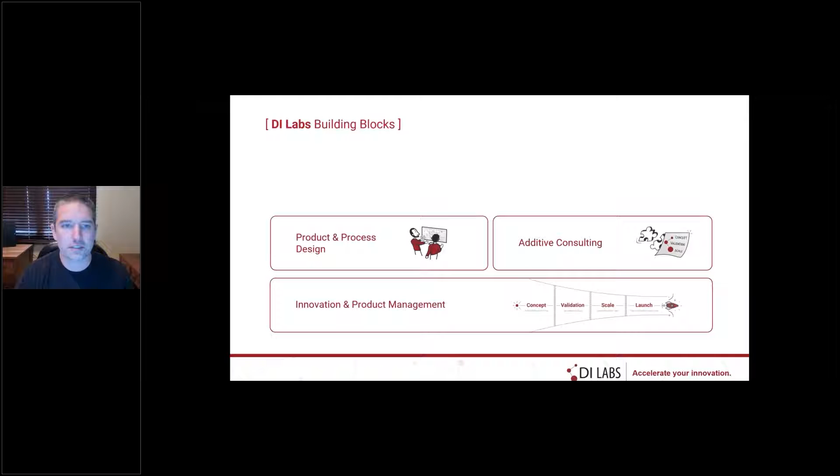So we use those capabilities to produce functional prototypes. These are things like 1Z, 2Z type parts, maybe up to 10 prototypes, generally used for look, feel, or function to validate a design before going into production. In addition to that, we've got what we call complex prototypes. We've got one in the presentation today—it's something that can't be produced as a single part, or it's extremely complicated. And we've got something neat to share today.

Then finally, we use those capabilities to run full production. We've got a couple of examples we'll share today where we'll produce parts in the tens of thousands on our additive equipment, using our equipment in place of traditional manufacturing like injection molding, for example. So those are the building blocks for our business.

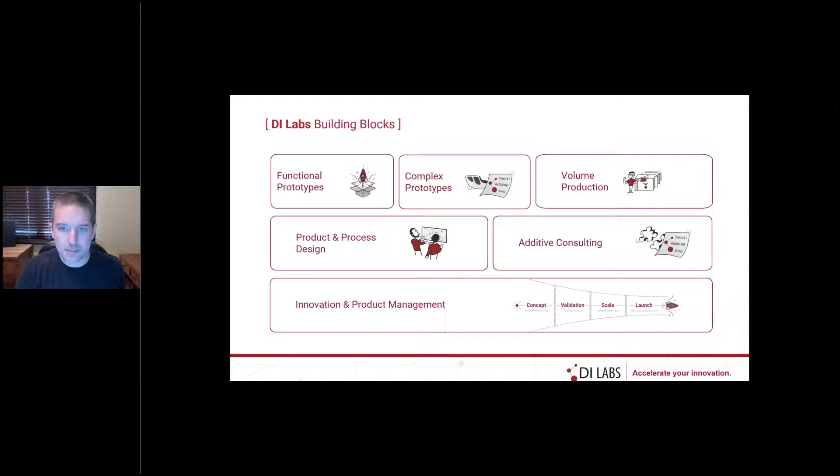I'll share a little bit about our history. Brian and I founded our company in 2013. We're geeks, we're gearheads, so we founded our company as a product development firm. The very first thing we tackled was the redesign of print heads for fused filament fabrication machines. One of the challenges we faced was we needed to be able to do prototyping to serve our customers' needs, but we needed to do it significantly faster than the technology on the marketplace would allow. So we developed a printhead system that was 2 to 4 times faster than anything else on the market.

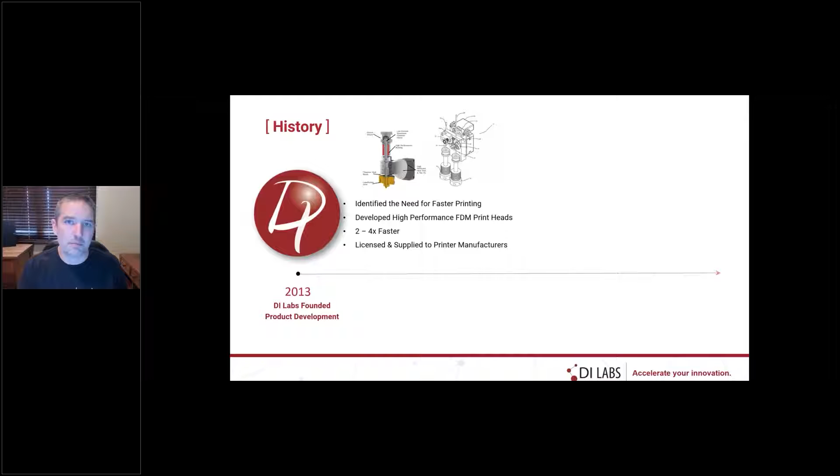And we did that for ourselves, for our in-house needs, and we found that the market also needed that technology, so we ultimately licensed and supplied that hardware technology to printer manufacturers. I think that's important for us to share, simply because we've been deep into the thick of it, and we recognize the need for speed—the need to get to market faster and capture the opportunities before your competitors do. Along with the development of that technology, we've also been developing products over the last several years.

Up until 2017, we were using the FDM technology that we had developed, along with SLA, to provide prototypes to our customers. We also did some outsourcing to other service bureaus, but what we realized was that either the quality wasn't there or the speed for us wasn't there.

So in 2017, we made our first major expansion with additive manufacturing, and we purchased an HP Multi Jet Fusion machine. We're proud to say we were the first in the state of Minnesota to have this machine, and it was necessary for us to provide quicker response time to our customers, as well as greater volume capacity. We purchased that at the end of 2017.

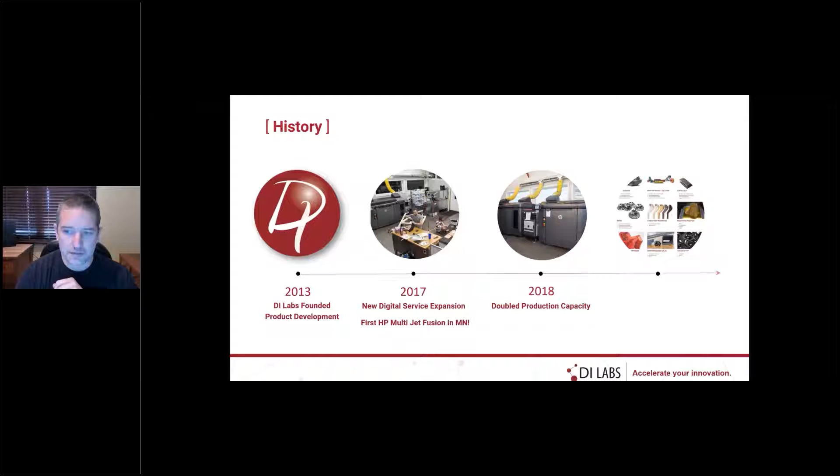About a year later, we doubled our capacity and brought on another 4200. Since then, we've continued to expand our technologies and technology portfolio to serve our customers' needs. Essentially, the way it works is our customers will bring us a project, and if we don't have the capabilities to serve the need for that project, then we'll make the investment in the technology to be able to do that.

We love to solve problems.

So looking at our technologies from a portfolio standpoint, we offer several different technologies. We operate the Multi Jet Fusion machines, both in grayscale as well as full color. We've brought on the Carbon DLS technology, which was a recent move. And we've got the Markforged machines as well, so we're able to print metal on the Markforged Metal X, and composite materials on the Markforged composite machines. In addition, we've got the standard FDM type technology for ABS and PLA, and a special machine that we run PEEK and Ultem and engineered materials on. And finally, we operate SLA.

And then we get ourselves into some pretty advanced finishing technologies, things like nickel plating, auto body level painting, or chemical processing of parts to provide smooth, sealed surfaces. So those are all things that we bring online to solve needs that our customers have for the finished products that we produce.

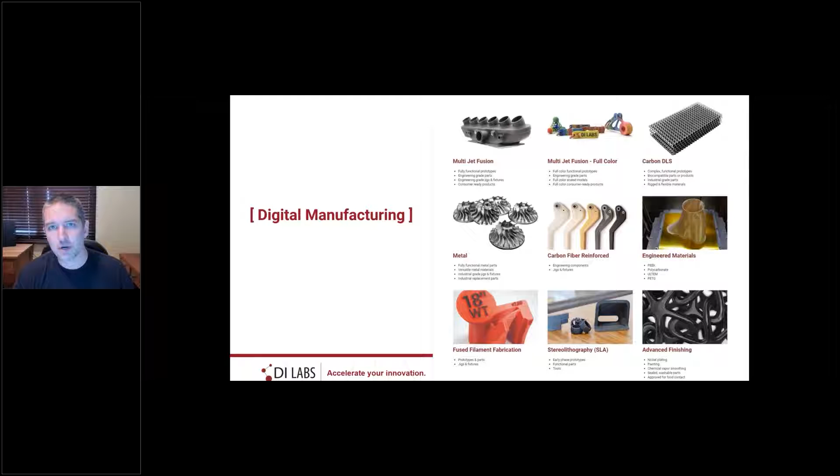So what does that mean, competitive advantage, and how do we use additive to provide that? The way that we think about it is in terms of the product lifecycle. I know that most of the folks on the webinar have been familiar with this type of graph. We added the development stage to this lifecycle chart.

Essentially, we've got the development stage, introduction, where the product gets introduced to the market and you start to build sales growth. Then you've got sales growth ramp up, which leads into a mature product line. And ultimately, at some point, that product line will mature and end up declining in terms of demand from the marketplace. We use additive manufacturing in each of these stages today.

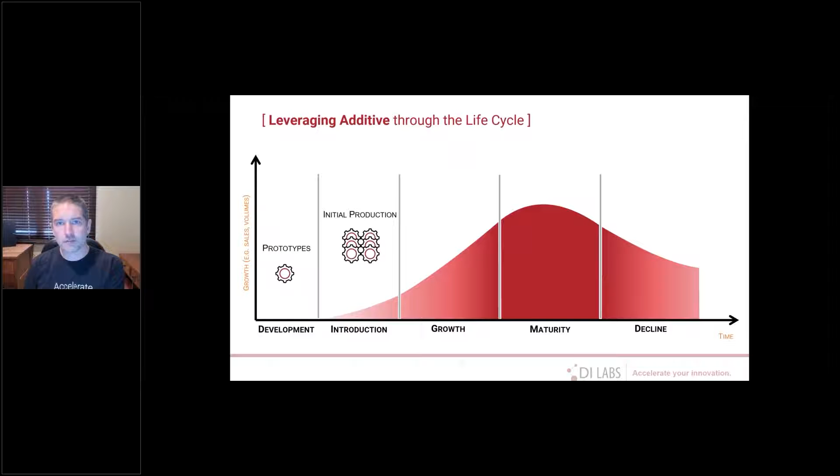In terms of development, I think we're all familiar with using prototypes for development activities—it's been common for decades. We're also using additive manufacturing for the initial production, thinking in terms of offsetting risk and getting to market sooner. We'll share some examples where we use our additive manufacturing equipment to bring products to market, get customer insights earlier and more often, so we can sense what failures may exist before we go all in.

Going through the growth phase, we'll use additive manufacturing in terms of a bridge solution. Where we start to get to that volume demand where additive manufacturing may not have the capacity, we'll use additive to get us to the place where we can use injection molding. So we'll consider that a bridge production tool.

And then in the mature stages, we'll use additive in terms of jigs and fixtures—really to help aid in the production of products using traditional technologies like injection molding or subtractive manufacturing.

And finally, in the decline stage, we're using additive for on-demand repair supply. Rather than having extensive inventories of parts for products that are obsolete or out of date, we're using additive to basically serve as an on-demand supply chain. As parts break, we're able to respond quickly with production, which saves extensively in terms of cost of inventory.

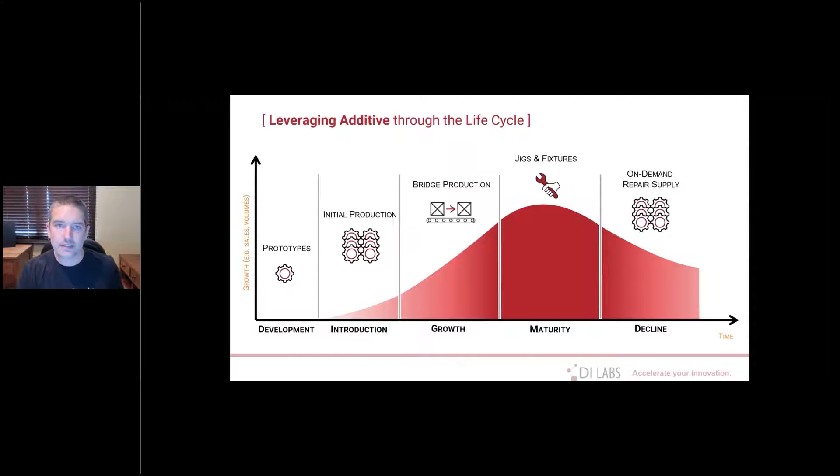For the talk today, I'm really focused on these four segments.

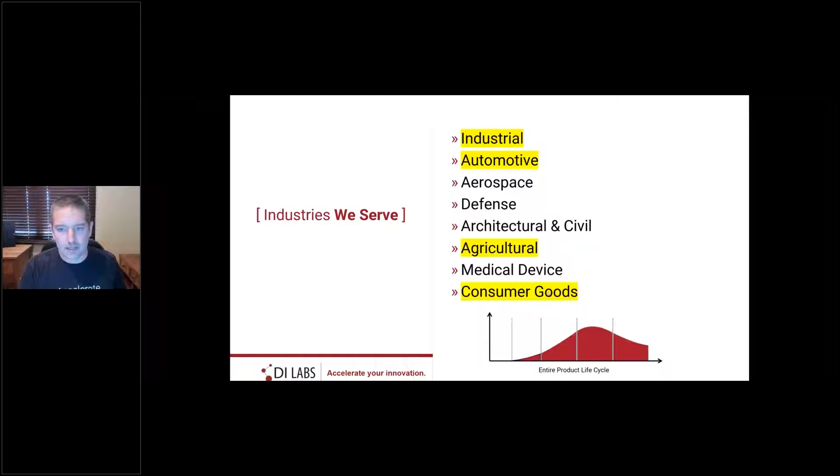Each of the examples we have today can be applied to all the segments shown on the screen, but primarily focused on these highlighted segments. And then finally, all of the examples we have will at one point or another encompass the entire product lifecycle from cradle to grave, and as we go through each product example, we'll highlight where they serve the life cycle.

So, case studies. We're sharing case studies in a two-step approach. First, I'll share with you the case study itself, how we applied additive manufacturing to solve a problem, what the results were, and where in the life cycle that solution took place. Then we'll go behind the scenes and share how the product or solution was made, basically how we did what we did. We'll share some tricks, secrets, packing configurations, and special considerations we had to take to solve the problem.

As we go through this, I've got 5 or 6 different examples. What I'd encourage everybody to do is, as you've got questions, raise your hand digitally or ask the question, and we'll do our best to answer those questions as we're going through the presentation. But please ask them as you have them.

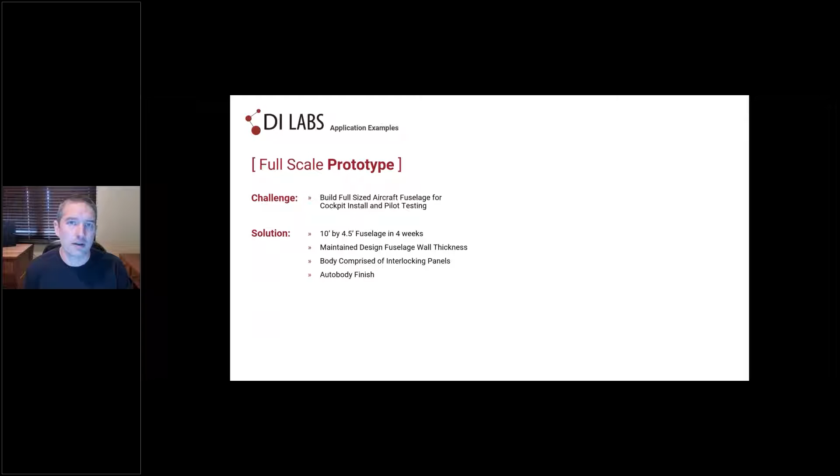This is an example of what that vehicle looked like. This isn't the exact product we produced for them, but one we've done for ourselves to demonstrate the capabilities. Now this fuselage looks seamless on screen, but it was produced with about 130 panels, and there are two halves. We're showing the autobody-finished half on this side, and the other half is unfinished. This particular model was about 8 feet long.

The stage of the life cycle we supported with this project was the tail end of the development stage, to validate the design. It's also been used to ramp up sales and provide visuals for potential customers, allowing them to see the aircraft before the mold and finished product was on the showroom floor. So this is a great example of using a full-size prototype to basically develop pre-sales with customers.

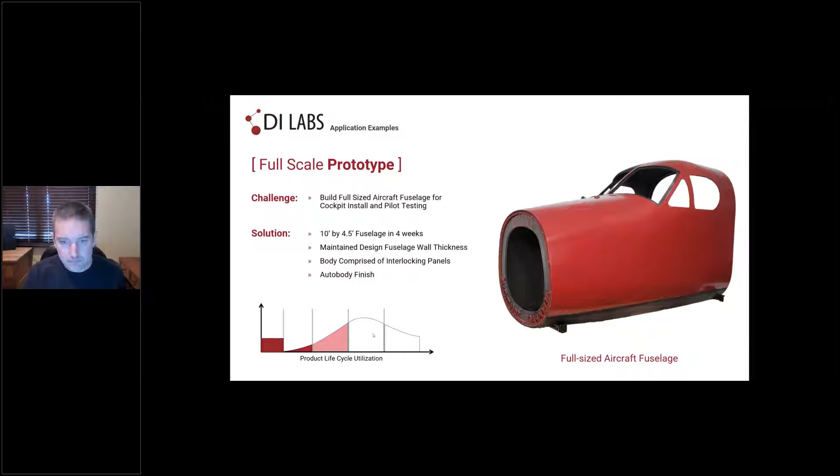So then the question is, how did we do it? That particular model was comprised of over 130 panels. That's pretty tricky because the panels are thin, and they all have to lock together - you can imagine it's like a three-dimensional jigsaw puzzle. So we had to design the panels to minimize or eliminate warping and dimensional change.

We designed the pack to optimize the thermal management so that we could produce the body panels fast and in volume without having distortion, and finally, to be able to maintain the outer surface of the skin.

This floating image on the screen shows one of the packs we had for the panels. As you can see, there's maybe 10 or so panels in this pack. There's also some other parts in this file that we ran along with this particular project. The entire fuselage was produced with nylon PA12. So this virtual pack shows what would come out of the HP multi-jet fusion, in nylon 12.

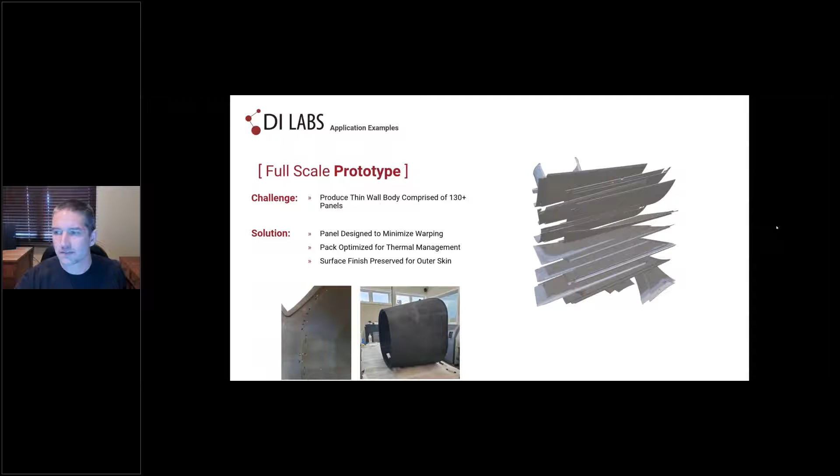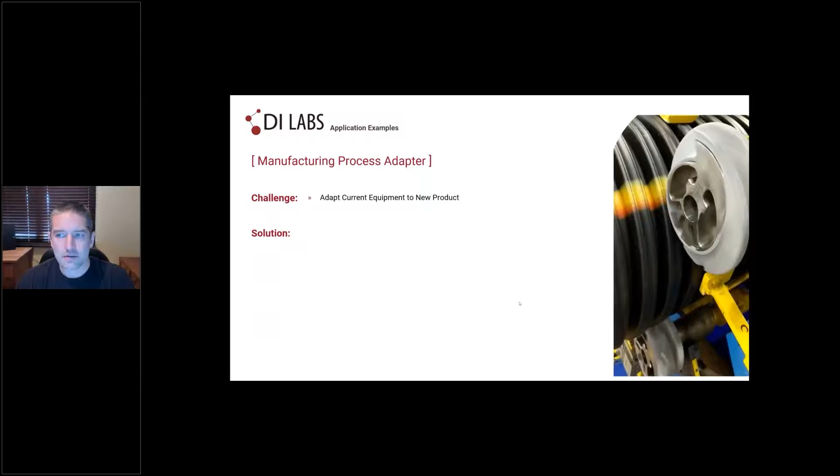Alright, we'll move on to the next case study, and change gears here quite literally. This was a manufacturing process adapter used for a customer that had developed a new product. It was a plastic tubing product, and they were challenged because the new product was different enough from their current tubing that the downstream processing equipment they had wasn't compatible with it. So they brought us the challenge of adapting the existing equipment to the new product, and doing so in a very short period of time.

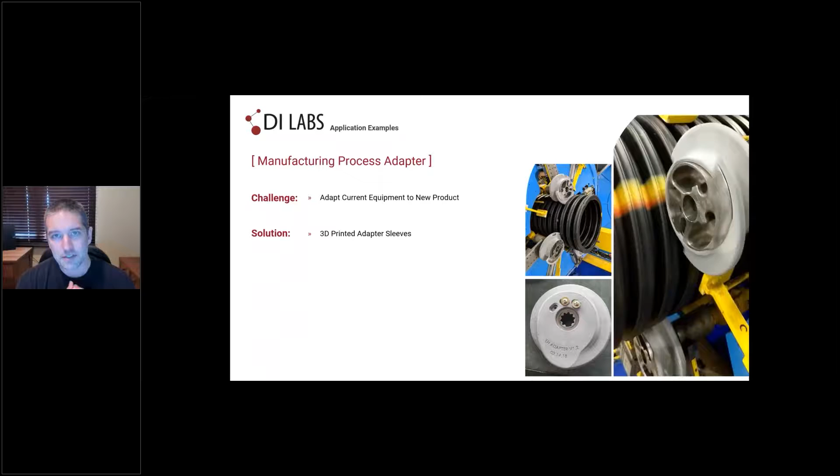As you can imagine, the product was being produced, and they had this secondary process where they needed to modify that product and get it out to customers, so time was of the essence. They brought us this challenge, and what we did was essentially 3D print adapter sleeves out of nylon PA12 and have them fit over an existing aluminum machined hub. So we adapted the existing technology for the new product.

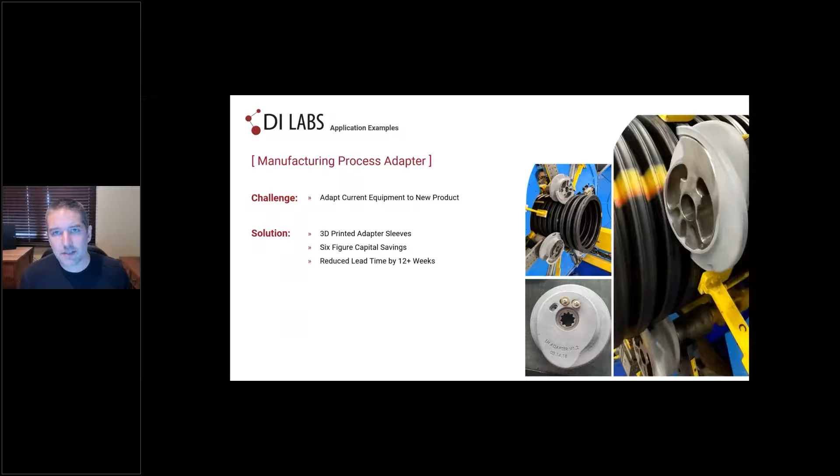By doing that, we saved about a six-figure capital expenditure, because they didn't need to make new aluminum hubs. On top of the expense savings, there was a time savings of over 12 weeks. The reason was the aluminum hubs took something like 12 to 16 weeks to machine, which would have prevented the new product from going to market in its final form. So in about a week and a half, we were able to reverse engineer the hubs and then 3D print these nylon sleeves to fit over them.

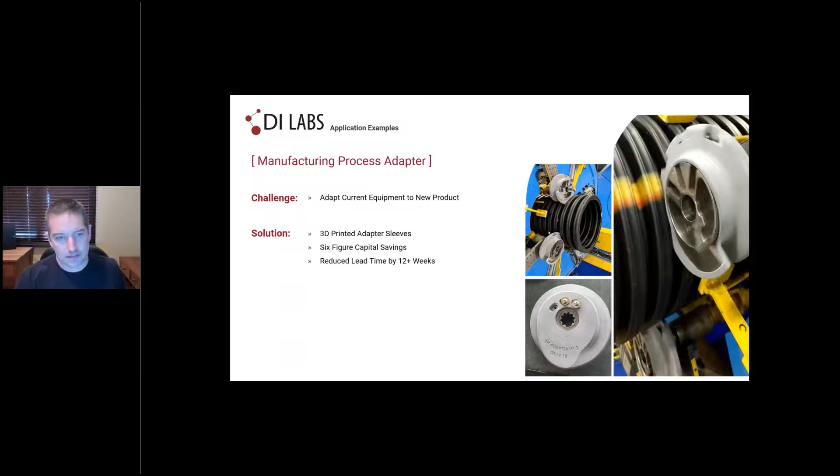This project satisfied nearly all stages of the product life cycle for this customer, from introduction to growth, and it has the ability to serve through the entire lifetime of the product in terms of manufacturing. In this case, the nylon sleeves may ultimately be phased out in lieu of aluminum hubs, but they do have the performance and strength to last the lifetime of the new product.

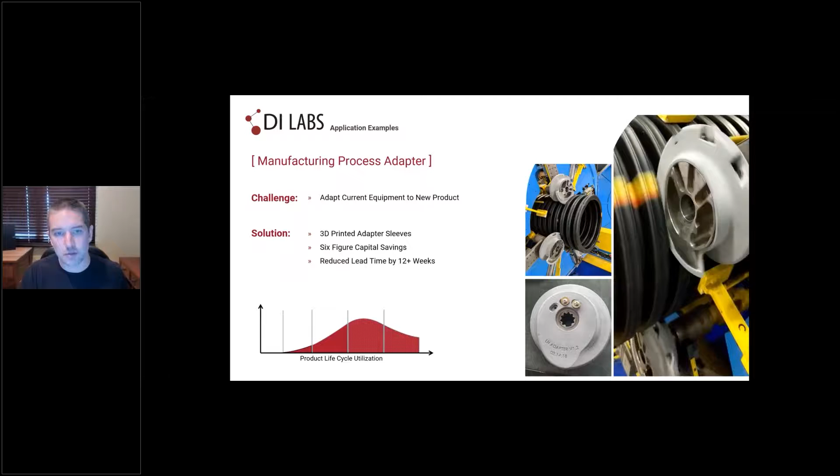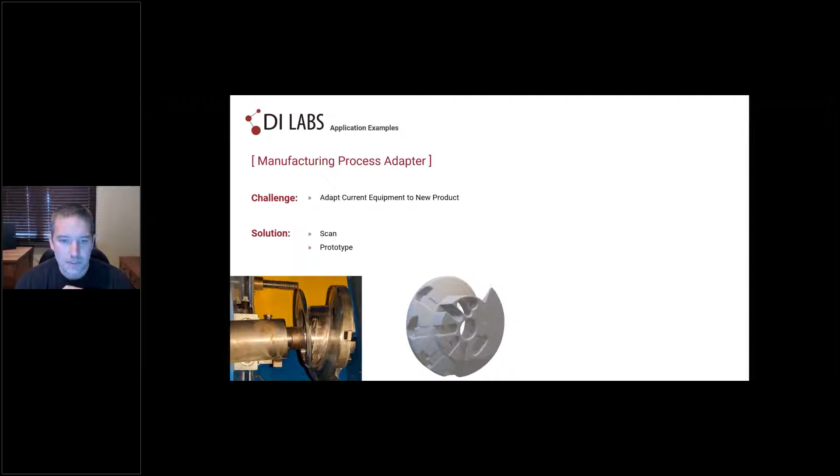Looking at this from a process and manufacturing standpoint for 3D printing, the process workflow for us was to scan the existing aluminum hubs. After that scan, we produced a prototype so we could have something to fit the new sleeves to. And then we transitioned into production.

This rotating image here on the right shows 6 or 8 different sleeves that are in a virtual build. For every one of the HP runs, we would have had about 8 sleeves that came out of a production run, and this is how the parts would have been packed in the build.

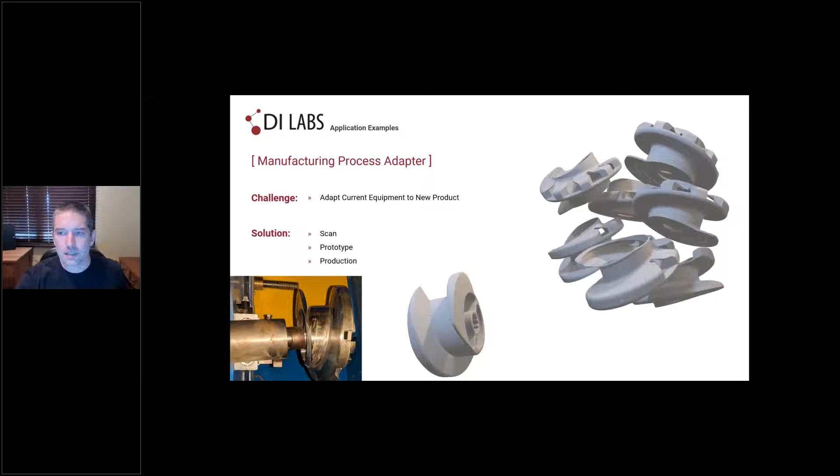I just want to make sure I'm getting the questions here.

Okay, so we've got a question: how durable is this printed sleeve, and can it be used long-term on a production line? That's a really good question. We found that these sleeves, after being operated for well over a year, showed a little bit of wear, but it was only in discoloration, not in thickness.

This particular solution is still in place today, and it's still serving this application. We found the sleeves to be quite robust, and because they're complemented with the aluminum hubs, there's really little extreme force being placed on the sleeves. So it turns out to be a great solution where you can combine subtractive manufacturing along with additive to solve challenging problems, and do so much faster and at a much lower cost than using just traditional subtractive manufacturing.

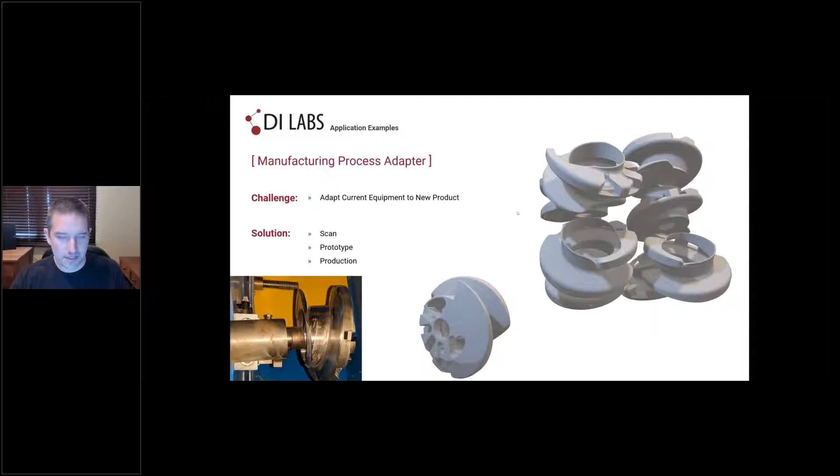All right, so we're going to transition now. We're going to change gears again into an example of a project where there was a new market introduction.

We had a customer that came to us and they wanted to launch a new watertight threaded valve body. It was part of a new piece of equipment, and they weren't sure how big the market would be for this particular valve body, so they were hesitant to invest in injection molding. They needed to assess the market, but that would require more than just 1 or 2 parts. So they asked us if we could help them finalize the design for additive manufacturing and produce these parts in low volume. The kicker was, of course, they needed them fast.

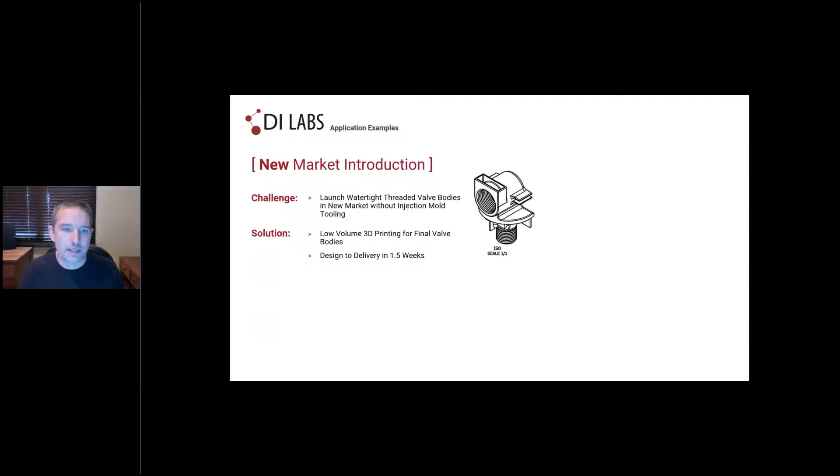They were at the place where they had the design nearly finalized, and the product this valve body would be attached to was going to market. So time was of the essence. We ended up taking this design, modifying it, and delivering it in about a week and a half. And we used it to satisfy the introduction and growth phase of their product lifecycle.

So the images here show the valve bodies, which we produced in nylon, the PA12. And they did have the threads built in. That was a requirement for the customer, that the threads would be built in just as they would be with the injection molded parts, and the threads needed to be watertight. This is something we had done testing on and validated before we went into production.

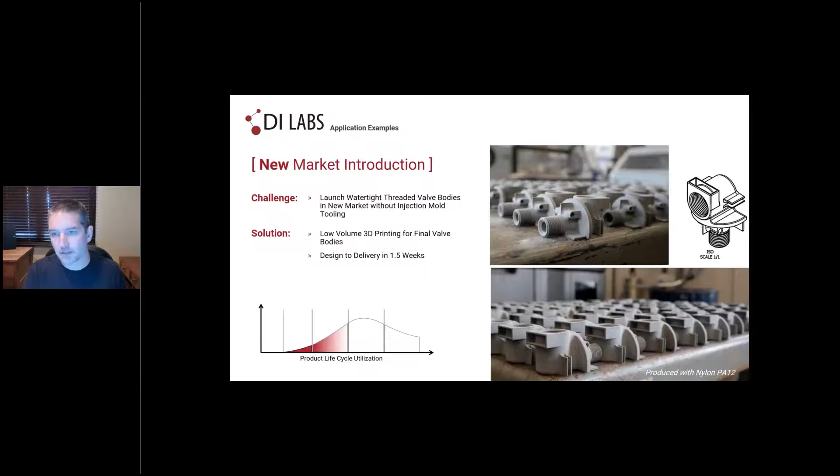So looking at this from a behind the scenes standpoint, how did we get away with producing these and having them be functional? It was really important and necessary to have threads that were functional and high performing. So we had done some testing before going into full production to make sure we were able to consistently produce those threads and have the dimensional accuracy necessary for water tightness.

We ended up developing a build pack design to optimize the output in terms of production volume, as well as part accuracy. The second component was streamlining the post-processing to remove the powder and get the parts so that they appeared to be nearly injection molded for our customer.

This rotating matrix is basically part of the build pack that we produced the parts in. Anytime we go through a project where we're transitioning from a prototype stage to full production, it's critical for us to assess the build pack layout and make sure it doesn't have a negative impact on the print accuracy and the consistency of parts from one part to the next.

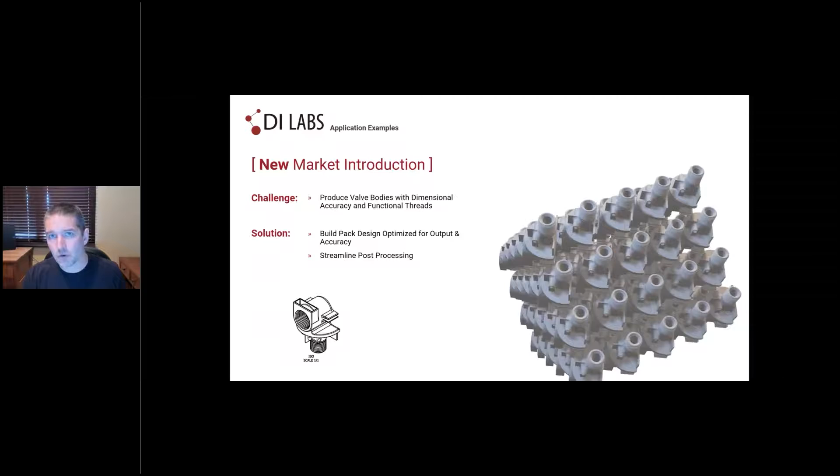One of the things about sintered powder printing is that it's a lot like injection molding in terms of thermal characteristics. With injection molding, if you've got parts with thick and thin sections, you can run the risk of warping or dimensional accuracy problems. We face the same things with additive manufacturing, especially with the sintering process. So it's really critical as we pack builds to make sure we don't have hot zones adjacent to cold zones in the build, because those thermal differences can create dimensional inaccuracies.

I'm going to check the questions here.

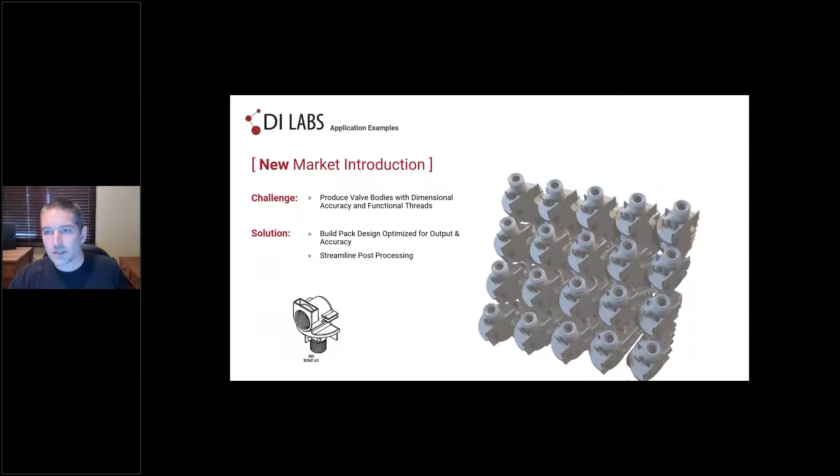We've got a question asking, were these parts designed for air or water, and does it seal? These parts were designed for water. They did seal. We had done some testing in-house. Most of the parts we did not chase the threads on, so the threads came out of the machine, parts went through post-processing, and they were functional from that point with the fittings the customer had as part of their injection molded assemblies.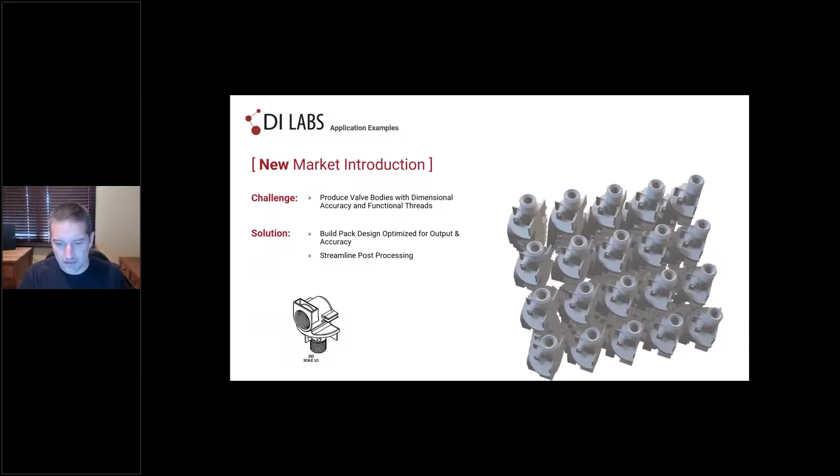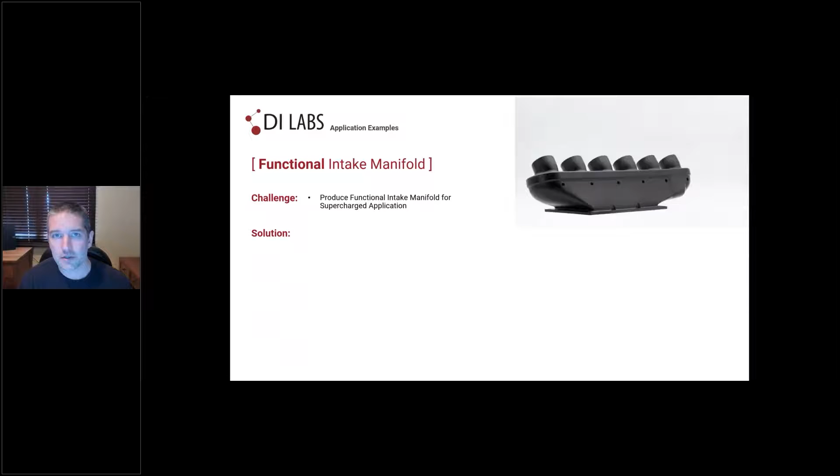Okay, switching gears yet again. This was an interesting project. This was a customer that was developing a high performance automotive solution. They were essentially applying a supercharger to an existing inline 6 motor that wasn't designed to be supercharged. They weren't quite sure what the market size would be for their system, and they needed to be able to dyno tune their setup. So rather than going into a cast aluminum manifold, they came to us.

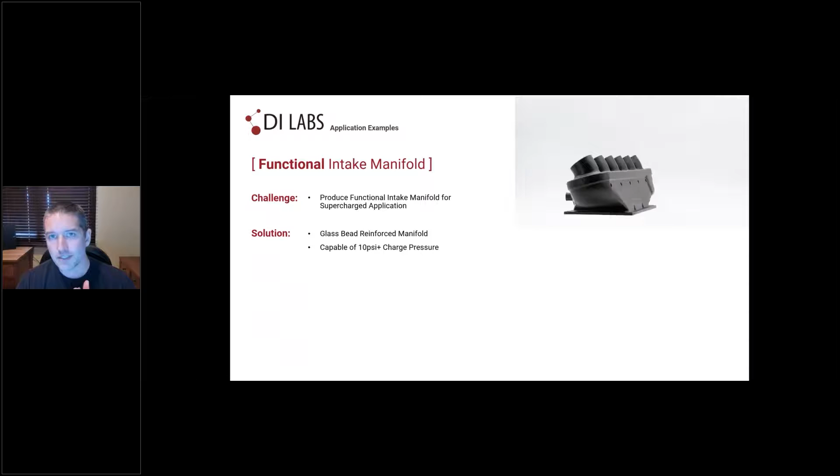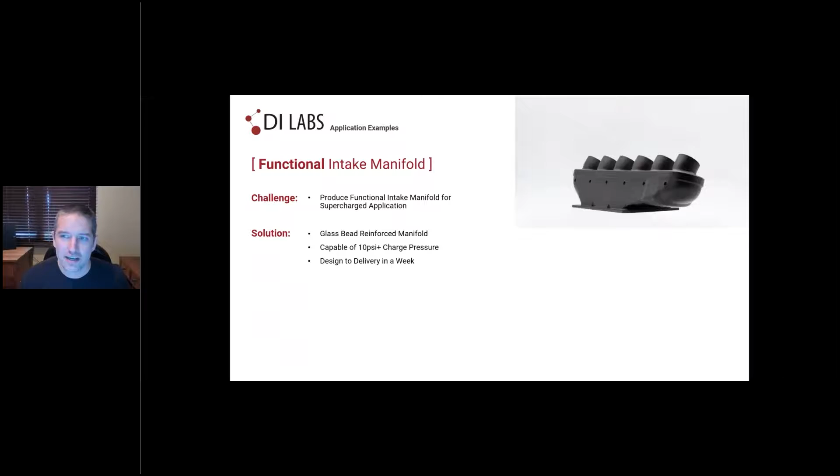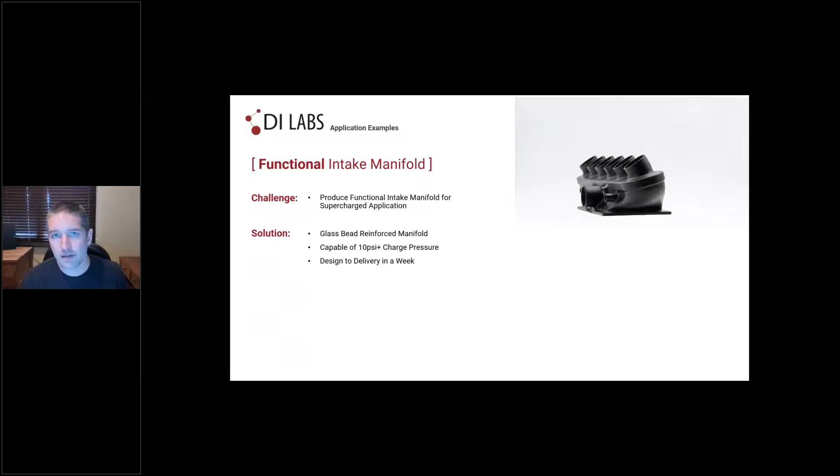We worked with them to essentially print their intake manifold. We printed it with glass bead reinforced nylon, and we worked with them to ensure the design was capable of withstanding over 10 psi of pressure for the temperatures it would be operating under. And again, the kicker in this case was that they needed to get the manifold on the car ASAP. We were able to reconfigure this manifold for additive and deliver it to them within about a week.

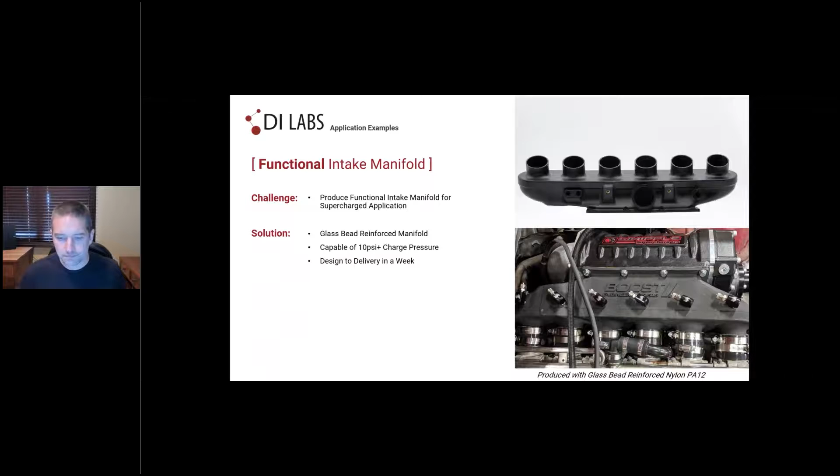So there were several parts of this system that were all printed out of the nylon. This is an interesting project that is still ongoing. We used Additive to support them in the final phase of the development, along with the introduction and growth. We're working with them to understand whether or not this is feasible from an economic standpoint for full production. Depending on the volumes that they're producing, this may very well be a viable resource.

For those that have looked under their hood in the last 5 to 7 years or so, I'm sure you've seen that there's a whole lot more plastic parts that are used for critical components of the engine, essentially on the intake side. So the materials that we're running for this manifold are not unlike what's being used by a lot of the OEM manufacturers for their underhood systems.

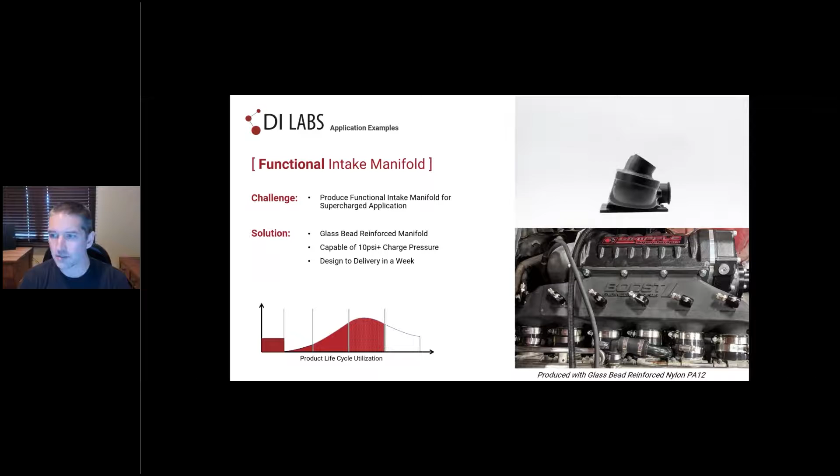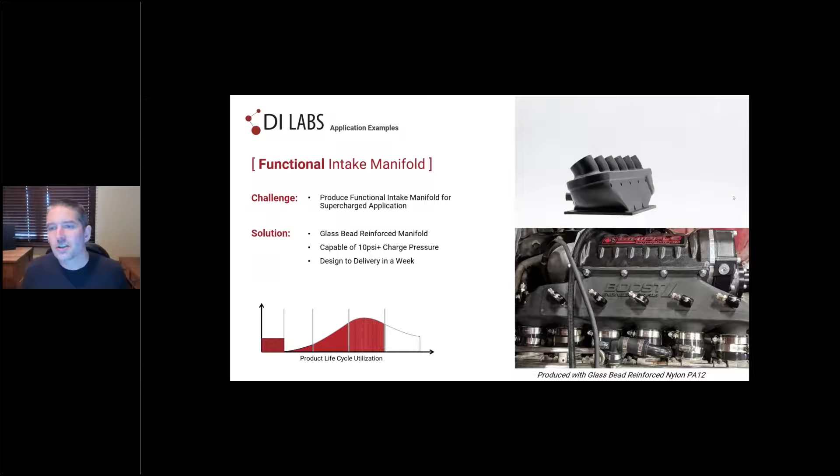So I just got a question. This is a good one. I'm glad you asked it. So the question is, are we able to thread plastic? And you'll see here...

Go back one slide. You'll see here on this image that there's a couple of brass fittings on the underside portion of this manifold. We had a couple of different options for the hardware connection. Either we could have threaded in the hardware, or we could have used brass inserts. And in this case, we decided the brass inserts would be a better solution. So these two areas underneath the manifold are essentially brass inserts, which are used for the support structure for the manifold and supercharger. In a situation like this, the inserts are a much better solution than either printing the threads in the part or tapping them after the fact. This turns out to be a great solution where we essentially heat stake the brass inserts right into the manifold.

Hey Carl, I have a question that just came in as well. It's from Sam, and he's asking about the surface finish. Is it easy to control the surface finish on a plastic part?

Yeah, that's a great question. So Sam, you may have picked up on the difference in the image on the top of the screen to the image that's on the bottom. The image on the bottom is a part that came out of our machine, and we essentially mechanically smoothed it, that's a form of tumbling. We did that because we wanted to have the smoothest finish possible. Then the surface finish on the top is a chemically smoothed part, which is basically smoothness taken to the next level. We are able to control the smoothness of the parts to a certain degree with the printing process itself, and then we've got extra levels of post-processing we can apply depending on the customer requirements. Generally speaking, you're probably looking at a smoothness, an RA smoothness, of the glass bead parts on the order of about 9 microns. When you apply tumbling as a finishing method, you're probably going to be in the 8 or 8.5 micron range. Using chemical surfacing, you're probably going to be down in the 1.5 to 2 micron range. So there are tricks to help control the smoothness of the surface finishes.

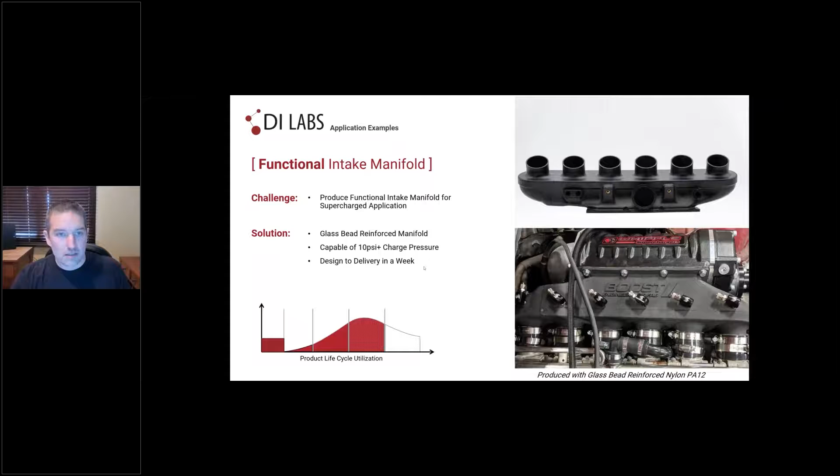Okay, so this one's pretty neat. This shows how the manifold was essentially produced. The manifold was larger than the build volume of the HP machine. So what we did is we basically sliced it into two parts and built in a mechanical joint so that when we connected the parts back together, they'd be watertight and able to withstand the pressure that they were subject to.

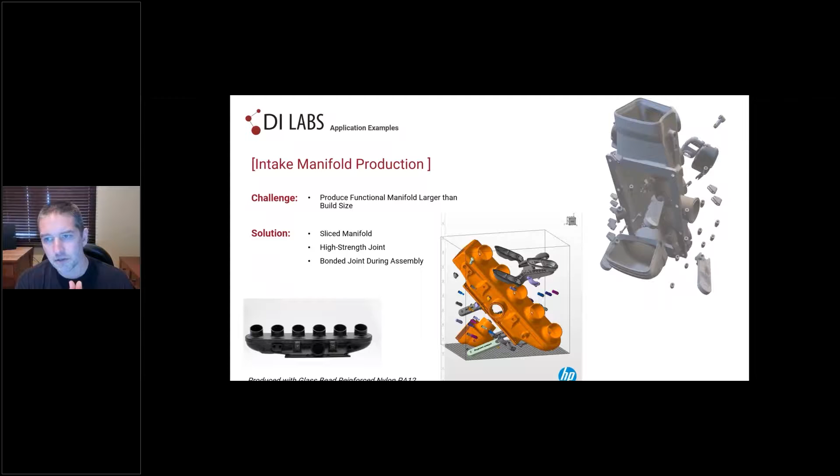You can see a number of other parts in this screen here. We did not change the build that we ran for this particular job, so you're seeing a typical job in the day of the life of a printer. Typically when we produce parts like this, in an effort to help maximize the thermal consistency within the build, we'll put other parts in the free space and make sure that we don't have extreme hot spots and cold spots. This is also part of the production process, to make sure that we are using as much of the build volume as possible.

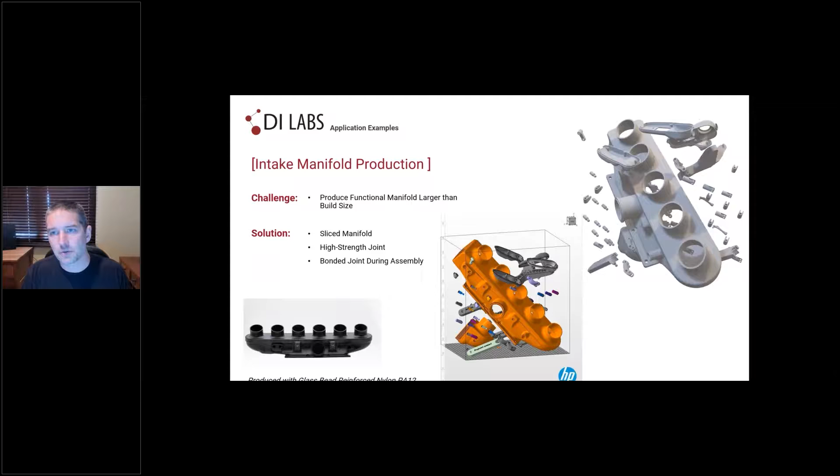And in this case, we did use an adhesive to connect the parts together. It was a two-fold connection, so the joint was designed so that it became positively engaged when it was assembled. And then, in addition to that, we had pockets where we put in adhesive to ensure that the joint would remain permanently affixed. All right.

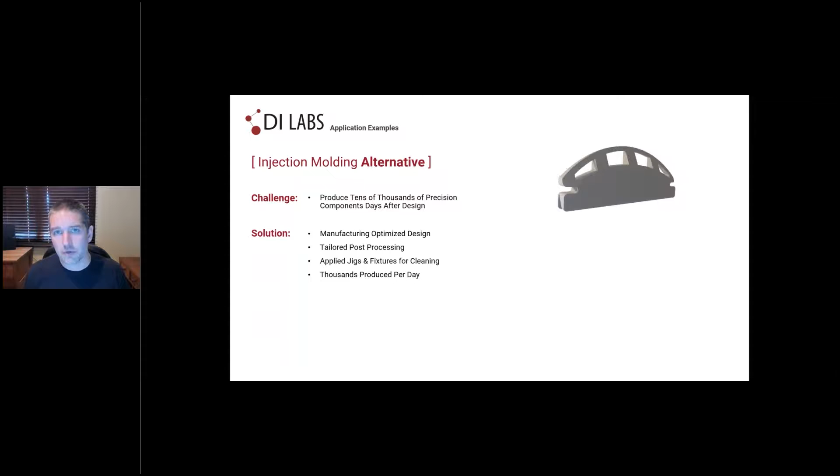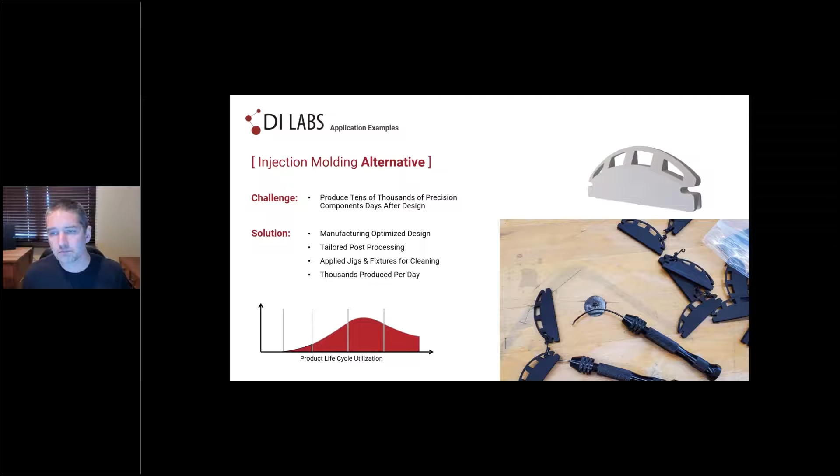And it was too challenging to injection mold, and on top of it, they were at the 11th hour. They needed to be able to get parts out as quickly as possible so that they didn't slow down their production operation. So this was a perfect example of where additive was able to deliver quickly and in the volume that they needed of tens of thousands of parts within a short period of time.

So looking at this from a manufacturing standpoint, we did have some challenges. The biggest was the powder removal from the internal channel and the handling during post-processing, especially with such a great deal of volume. So it's kind of neat - we built in a channel cleaner. You could picture this as like a built-in pipe cleaner that was designed right into the part and produced as part of the production.

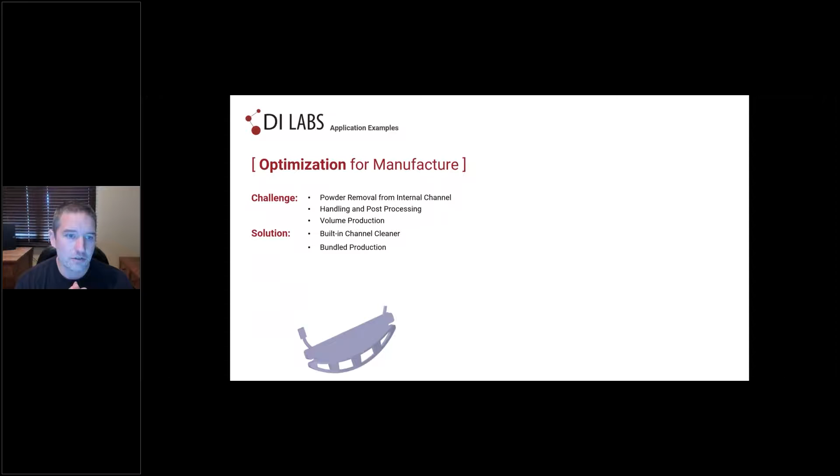And then the other thing that we did to help improve handling is that we printed these in batches of 5, so that when you pulled a batch out, you knew you had 5 parts, and it was easier to manage the removal of the built-in pipe cleaner, as well as the post-processing and cleaning of the channels.

Hey Carl, we have another question that just came in: how repeatable is the HP technology, and how do you verify accuracy?

That's a great question. It's like really any additive or manufacturing technology, there's a specific art and skill set required in order to maintain dimensional accuracy. If we were to put parts in our machine and not be conscientious of the pack density, orientation, or cooling rate, we would have a great deal of variability. So when we produce jobs like this, we produce them so that we have consistent pack density and consistent part orientation after we validate the initial dimensions. We've found that we're able to maintain extraordinarily tight tolerances on the order of plus or minus a few thousandths. That's geometry dependent, of course, but we're able to maintain very tight tolerances near that of injection molding in volume, but it requires us to be very conscientious of the production and cooling processes. Thanks for that, and another question: what is the largest volume of one particular part that you've printed?

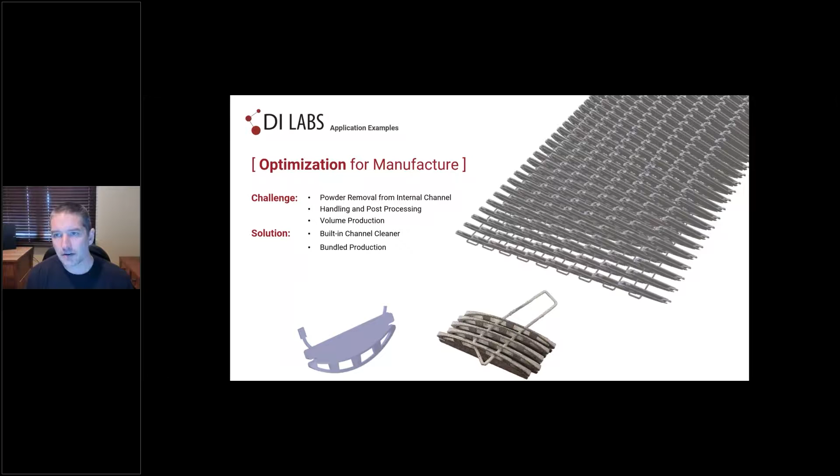Boy, that's a good question. We're probably in the neighborhood of maybe 100,000 parts of volume for a single component. This was probably among one of the larger projects that we've done in one fell swoop. It was one single order, tens of thousands of parts. We're seeing more and more of that, where additive is being used for extraordinarily high volumes of production. If we were asked back in 2017, when we purchased our first HP, if we could see ourselves producing parts at that order, I'm not sure we would have said we could, but after we understood the technology and how to leverage the output, 100,000 is definitely not the ceiling.

As with any production technology, producing the parts is only part of the equation. It's the post-processing of the parts, the cleaning, the handling, the dimensional measurements that can be a bottleneck. So those are areas where it's really critical to optimize that leg of the process to make sure it's not a bottleneck.

It seems that we've hit a pretty interesting topic here. I have another question asking about what's easier for you to print, smaller parts or larger parts on the HP technology?

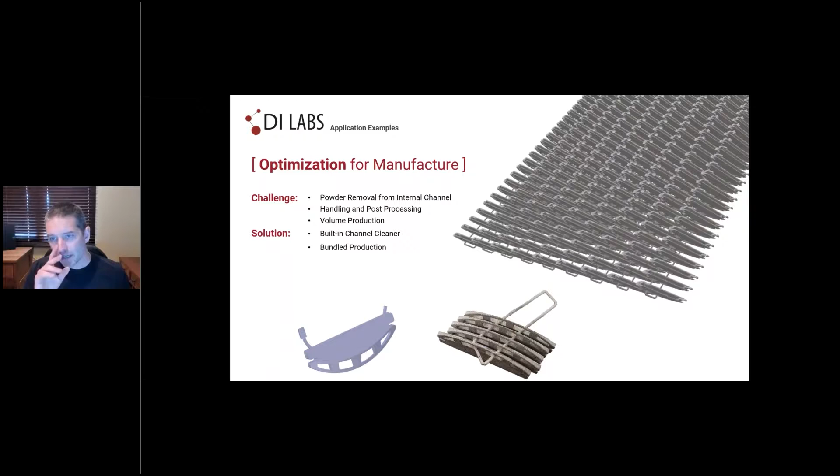Easier is an interesting question. There really isn't one that's necessarily harder than another. Because of the build volume of the machine, think about it like a foot cubed — a little bit larger than that, but think about it, a foot cubed. The larger the parts become in that build volume, the more costly they become. So we found that from a production standpoint, smaller parts tend to be ones we're able to run at higher volumes and be economically competitive. As the parts get larger, that can be a little bit more challenging from a cost structure standpoint. But it's really not harder or easier from a manufacturing standpoint.

Perfect. Thanks, Carl. That's all I had.

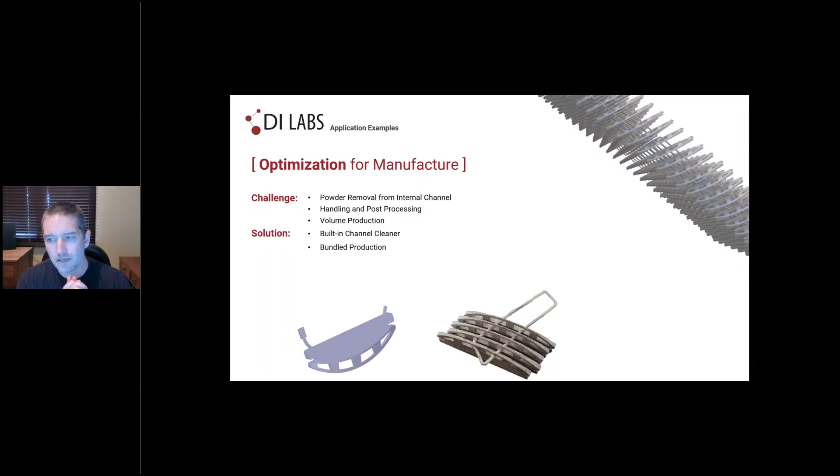Another great question: do you have any additive materials that can be used directly in the human body for medical applications? The short answer is yes. The long answer is that's a really nuanced and very specific area. I'd be definitely interested in talking more about that with you, Rob. The short answer is yes, we'd like to talk about that.

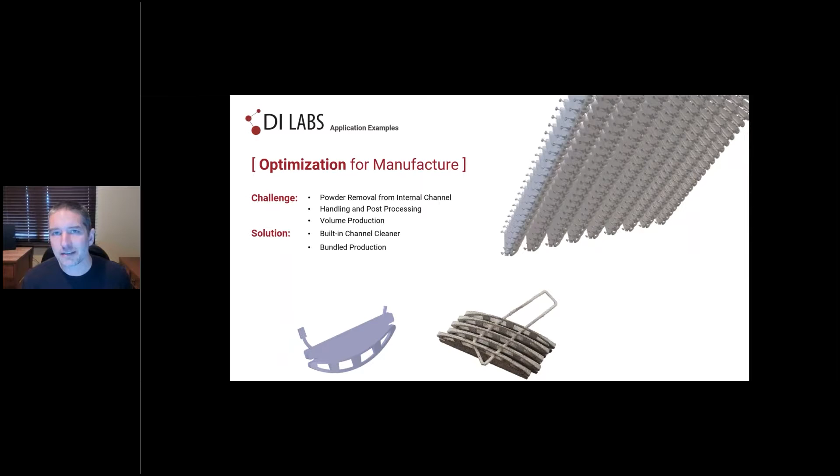Any other questions before we move along?

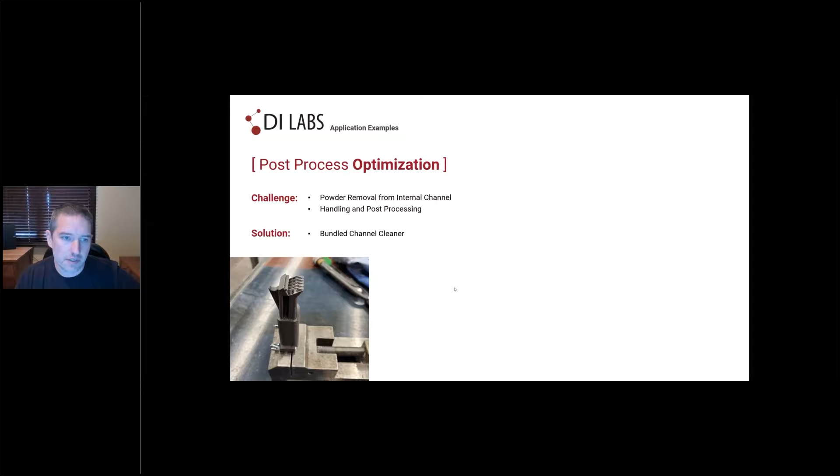We're going to stay on the same project on this slide. This was kind of an interesting process for us. As we continue to produce those small parts, we found ourselves optimizing the process, and I wanted to share this with you all today. This little part here on the screen is a jig and fixture that we designed to clean the channels of those parts. This was printed on the Markforged, so it's a reinforced nylon 6, and it's an assembly that has some action to it. So I'll play a short video here.

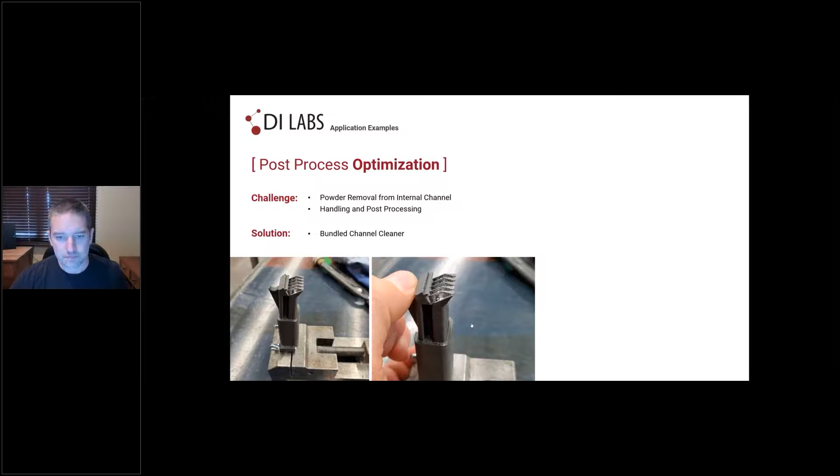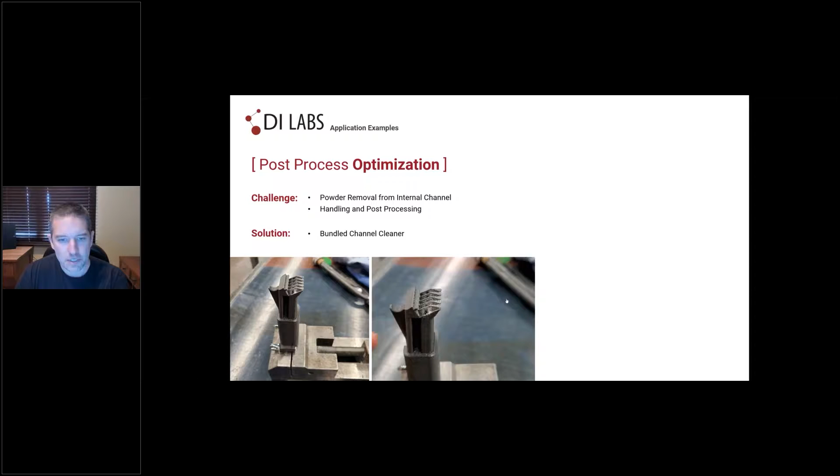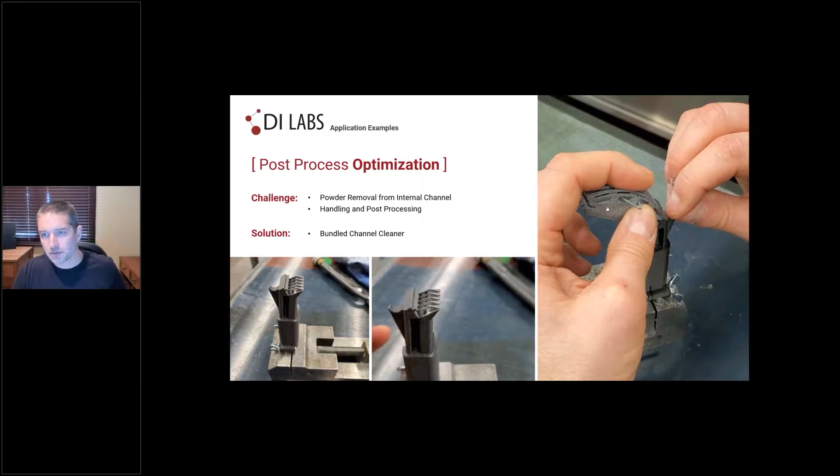So we designed that system so that it had nested pipe cleaners in it, and when you press down the trigger, it would essentially insert those pipe cleaners into the channels of the part. I've got another video here that shows that system actually cleaning out a bunch of parts.

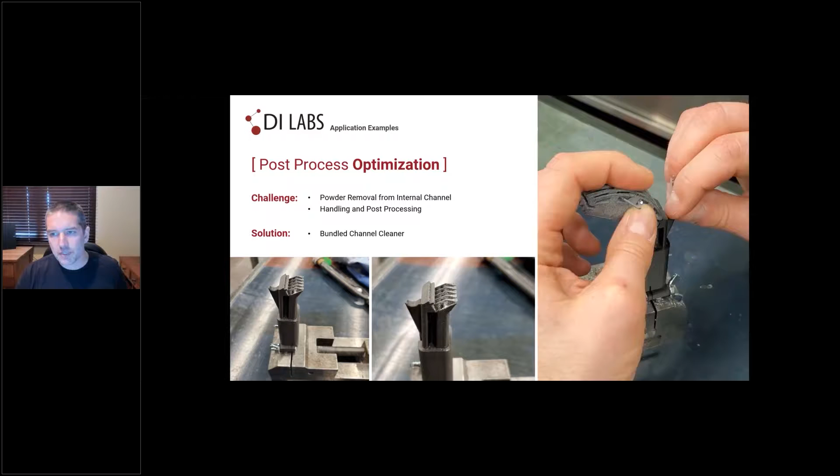So this was a prototype fixture that we developed. There was a production version that was a little bit different than this design, but they were all 3D printed. It just goes to show how you can leverage additive manufacturing to be extremely responsive, to help either streamline a process when you get into production or reduce time. We found this to be extraordinarily valuable for that leg of the project, as we got to the 25% mark. This was something that we implemented.

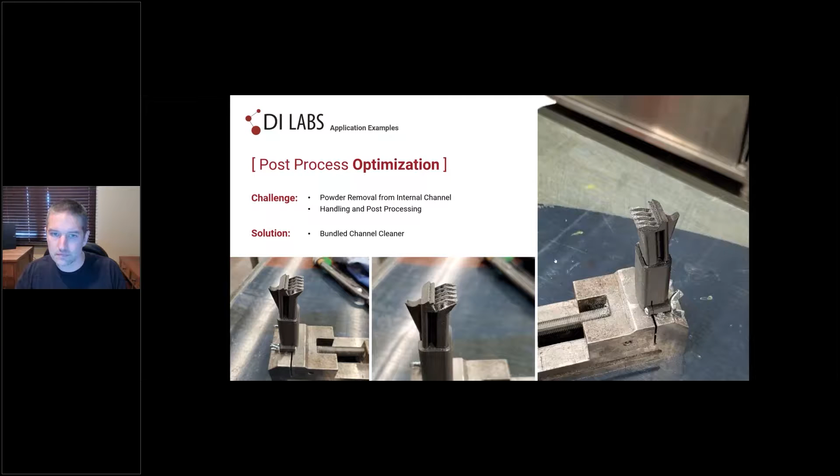And yes, we did hire a Seinfeld hand model for that, in case anyone was wondering. Beautiful hands, beautiful hands. I was just going to ask you that question, Carl.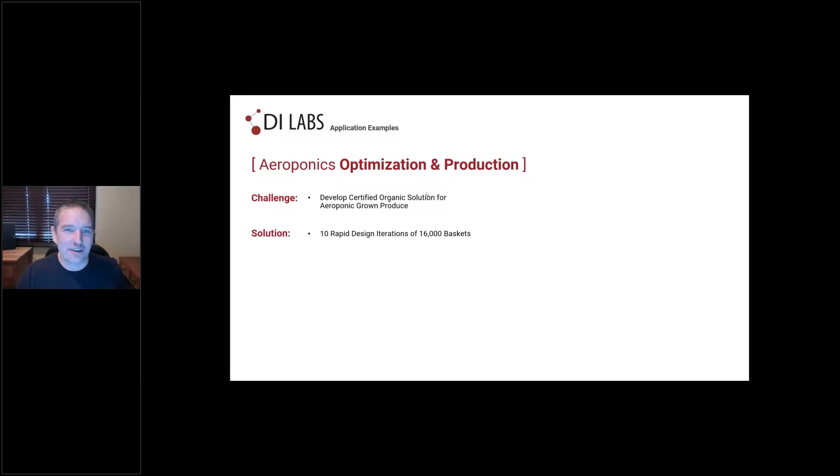Okay, moving along. This is another project that was pretty interesting. This was an aeroponics optimization and production project. A customer came to us that was doing aeroponics growth of produce, and they wanted to be able to go full organic. The baskets that they were using for their lettuce didn't permit them to do that.

So we worked with them to develop baskets similar to what's shown on the screen here. We worked through a series of about 10 iterations involving about 16,000 baskets that we produced to make sure we were able to manage the growth cycles, deliver the organic requirements that our customer required, as well as optimizing the growth cycles. Through those efforts, we were able to provide over a 30% increase in produce yields, along with a reduction in growth time.

This is really remarkable. I realize there may not be a whole lot of agricultural folks on the call, but we did 10 design iterations of 16,000 baskets over a period of 90 days or so. We were able to basically test at scale, and that was remarkable for us in order to optimize the product design and optimize the results.

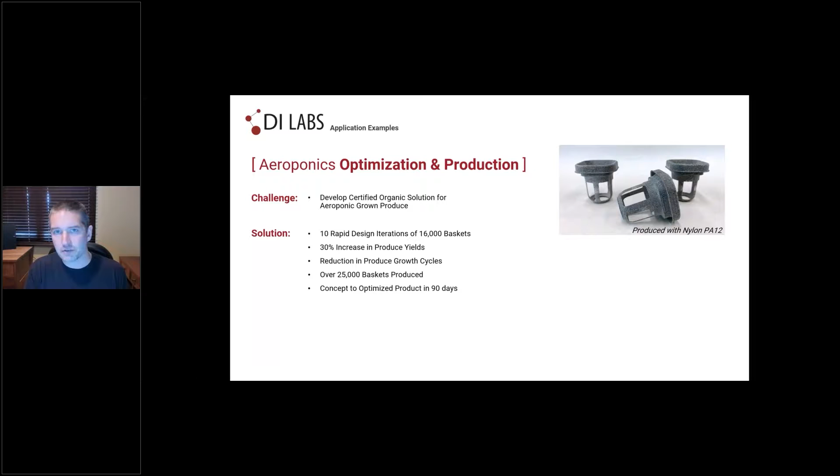We found results that we would have never expected. Had we been injection molding these parts on the second or third or even fifth iteration, I don't think we would have been able to uncover the type of headroom that we found in terms of positive results. So to date, we've done something like 25 or 30,000 baskets in production.

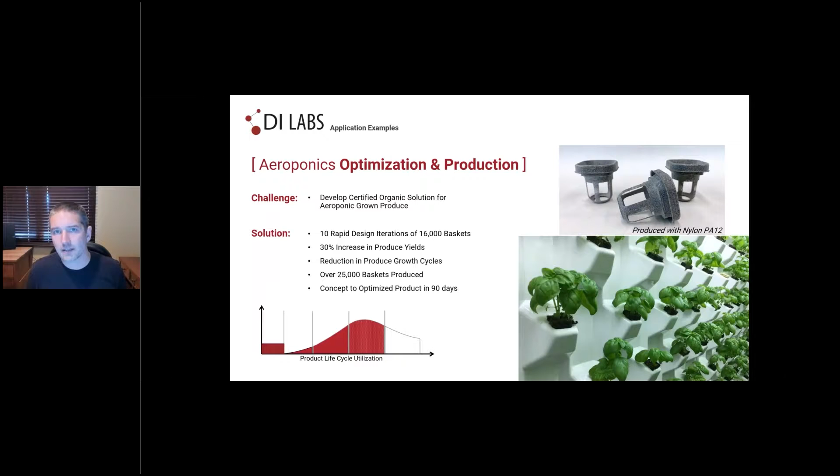This shows an image of what some of that produce looked like growing on the aeroponic panels. We utilized additive for this all the way through to the growth and maturity stage of the product life cycle. The other interesting thing about this project is that we achieved such remarkable results in terms of produce output that we uncovered another market opportunity with a completely different type of produce than what our customer was growing—something that was much higher profit for him. So we uncovered a whole new market opportunity that we would have never been able to uncover had we not leveraged additive manufacturing.

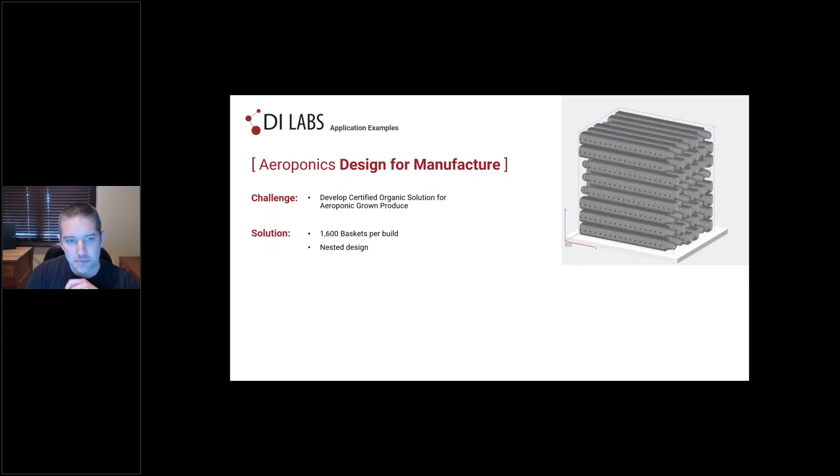From a production standpoint, we produced about 1,600 baskets per build. They were nested like solo cups. This shows a row of the baskets nested, and this is a neat photo that shows the baskets in the print process—probably halfway through one of those rows as the parts were being printed. This was being done in the multi-jet fusion machine using nylon 12.

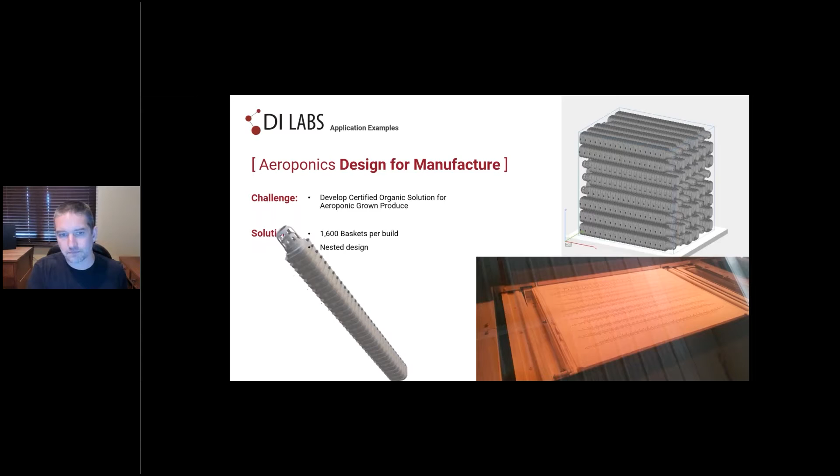As we were going through our post-processing exercise, we uncovered opportunities to build handling fixtures basically into the parts, so that when you pull a row or stack of parts out, they have built-in carrying fixtures to help simplify the post-processing.

Hey Carl, I have a question here from Paul asking about the time it takes to clean the parts—is this time-consuming? It can be.

Every project is a little bit different. These are pretty extenuating circumstances because there are so many parts and they're caked with so much powder. When we take a project like this on in a production type phase, we'll develop the downstream process to semi-automate the cleaning of the parts. If you were to try and manage these parts with just a standard hand-style bead blaster, it would take an extraordinary amount of time—longer to post-process than to print. So in these situations, we develop the process to streamline that. We've gotten these types of projects down where the post-processing isn't that painful, but it can be if you don't have the infrastructure in place.

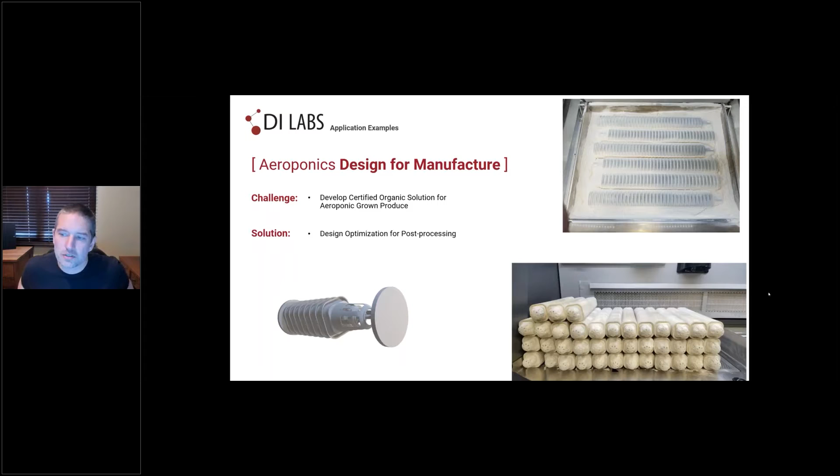Question just came in: are we helping with COVID? We are helping with COVID. Additive manufacturing—and I'm sure everybody on the call has been in tune with the news—is a perfect technology to be able to respond quickly to things like COVID. We've been developing tailored solutions, whether it's masks or shields, for particular industries and customers. We're able to go from essentially design to production overnight. So yeah, the short answer is yes. It's neat to see additive manufacturing coming to the call of duty.

Hey Carl, I have a question that just came in from Cameron about your post-processing capabilities. Could they send jobs to you to control surface finish? Is that something you have capabilities to do in-house? Yes, we are. We will typically post-process parts that we produce. Sometimes we've got customers we have great relationships with that have equipment, and they'll send us parts to help them from a plating, finishing, or painting standpoint. So we do help some of our customers with that.

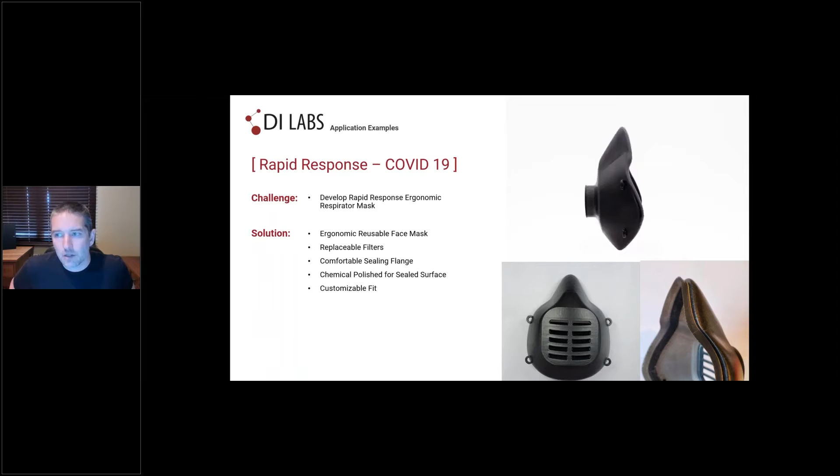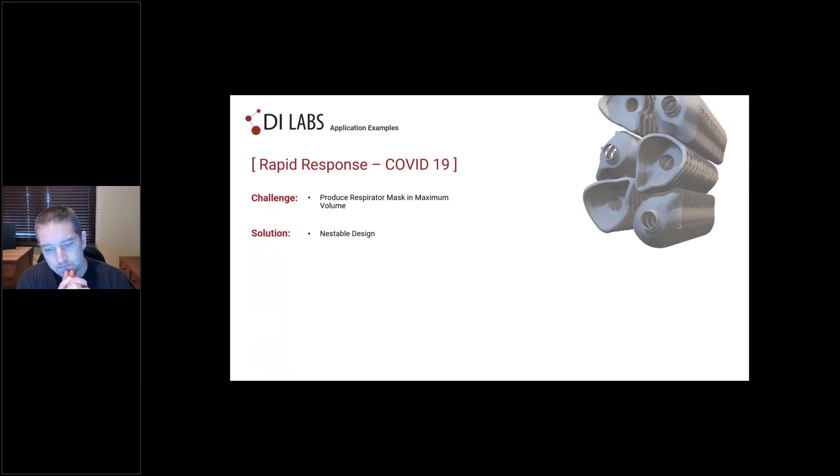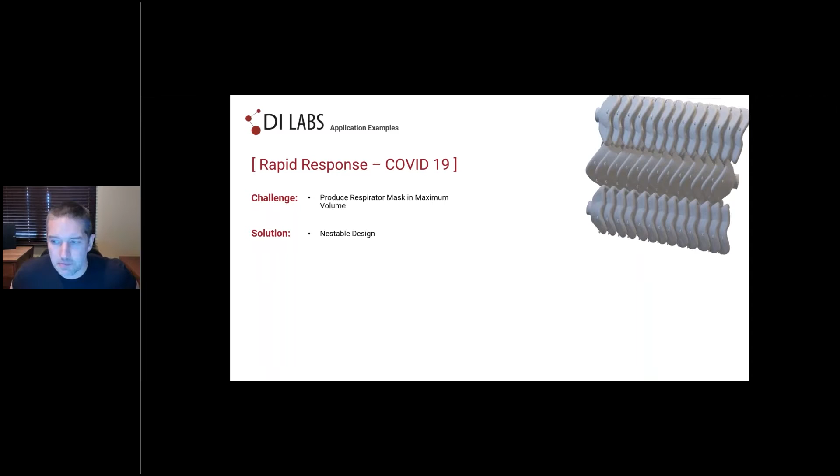And it looks like there's another question that came in about sterilization. How easy is it to sterilize HP material? Very easy. A lot of the parts we're producing today in response to COVID are being sterilized with radiation as well as the heat method—the name escapes me—but they're able to be sterilized with all of the most common sterilization methods.

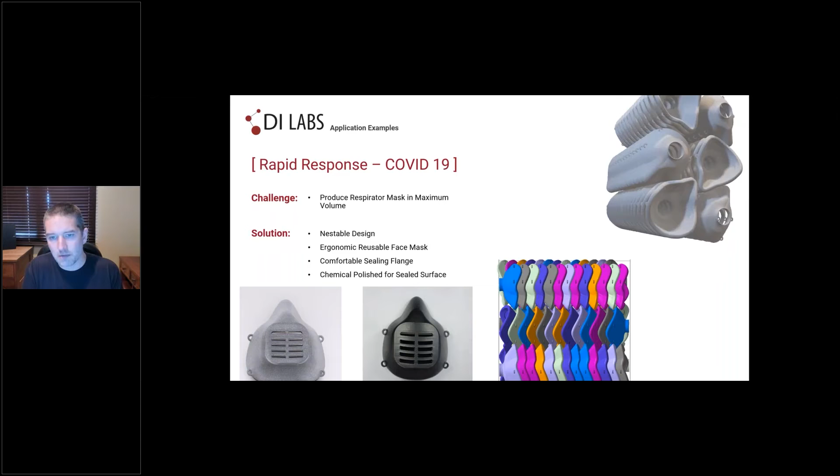I'll just share a couple of the images I had on the next couple slides showing the pack of the masks. There are several different mask designs out there. We developed our own mask design that allowed us to pack them extraordinarily tight so we can improve production output. If there's an Achilles heel of additive manufacturing, it's that it's not as fast as injection molding, but there are tricks to help improve output. So those are areas we focus on.